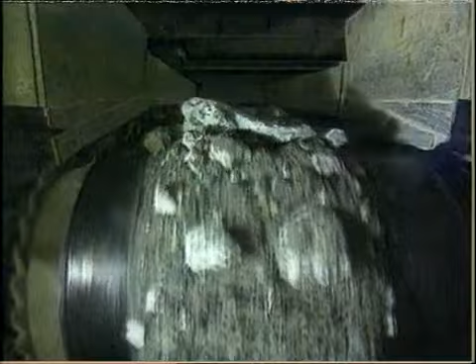When you're about to drink some water, do you ever think about whether or not it's clean? No, I've never thought about it. I'm sure it's clean, no problem. Only to a certain extent. Say, in Ma On Shan, there is sand in the water. In some districts, the water is poor in quality. Drinking water is sometimes clean, but sometimes it isn't.

We say that drinking water is purified if it has been treated by the treatment works. A person needs about 120 litres of purified drinking water daily. How can this water be considered clean? According to the Water Supplies Department, drinking water in a modern city should be clear, odourless, wholesome and bacteria-free.

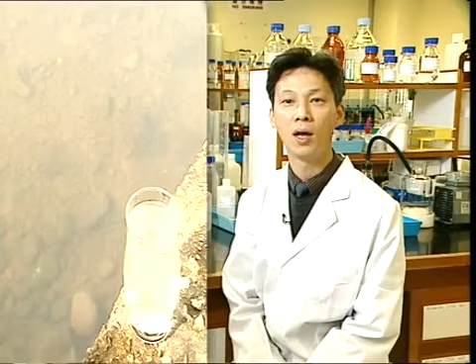Here is a glass of river water. Is it good enough for drinking? Does it meet the criteria of the Water Supplies Department for being clear, odourless, wholesome and bacteria-free? Of course it isn't. River water might contain sand and other solid particles, as well as lots of invisible living things, organic matter and inorganic substances.

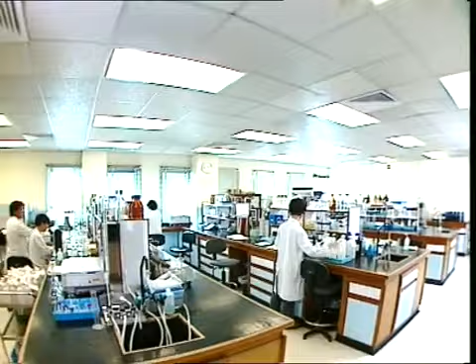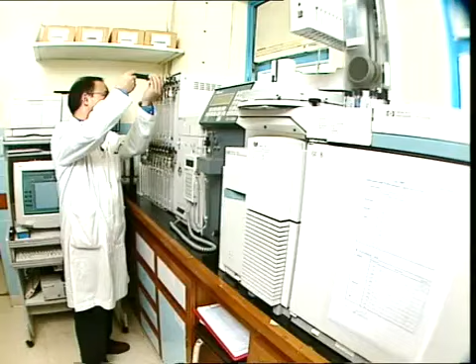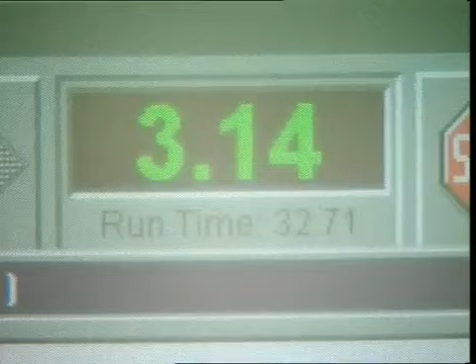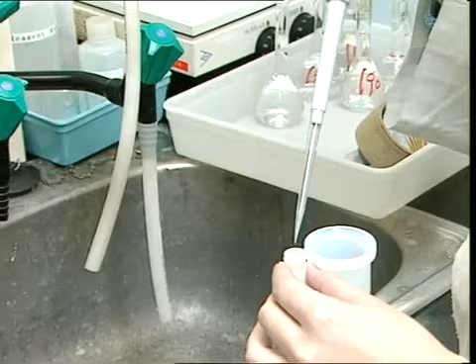The water filtered here, before it is supplied to users, has to be randomly sampled and tested to ensure that it meets the standards of the World Health Organization. For instance, we would use gas chromatography to calculate the trihalomethane content. We use an atomic absorption spectrometer to determine the level of heavy metallic ions.

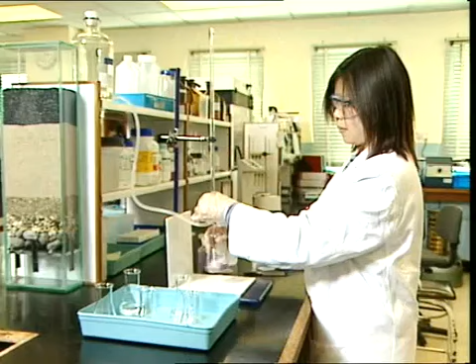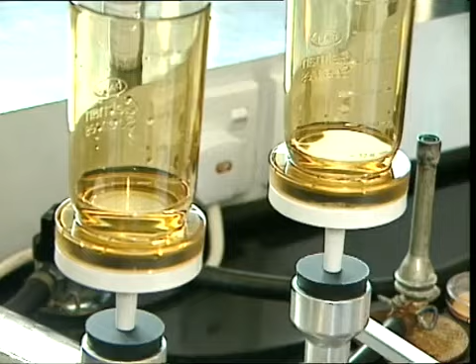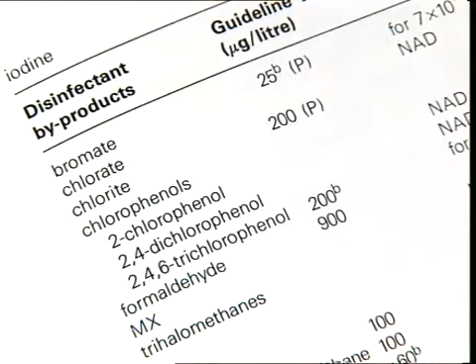We use titration to measure hardness. And membrane filtration allows us to estimate the amount of E. coli. A total of over 100 parameters have to be maintained, and all of them have to meet the standards laid down by the World Health Organization. Then, the water is considered suitable for human consumption.

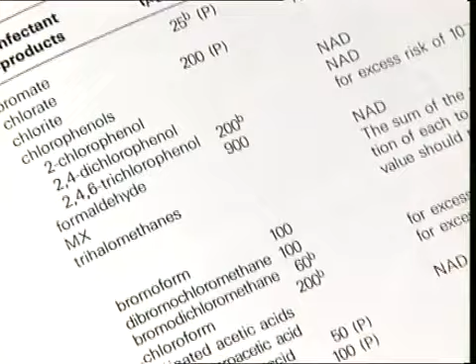In 1892, a strange event happened in two German cities, Hamburg and Altona, on opposite banks of the River Elbe. People of both cities drank from the river. In Hamburg, people led a happy life. Everybody drank from the river and lived peacefully. Until one day. Oh, I've got a sore belly. Me too. We do as well. In a short while, many citizens complained that they had a sore belly. Later they died.

What's strange was that on the opposite bank, people in Altona were fine, though they also drank from the same River Elbe. What was the reason? The mayor of Hamburg immediately sent agents to Altona to investigate, and they discovered the secret. It turned out that although people in Altona also drank water from the River Elbe, they filtered it before drinking.

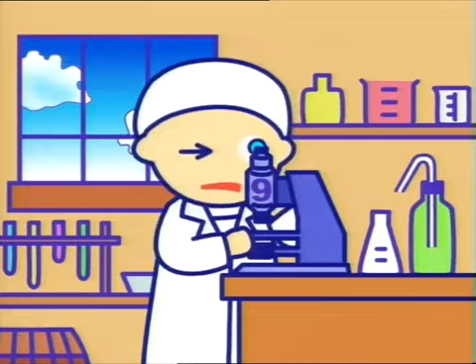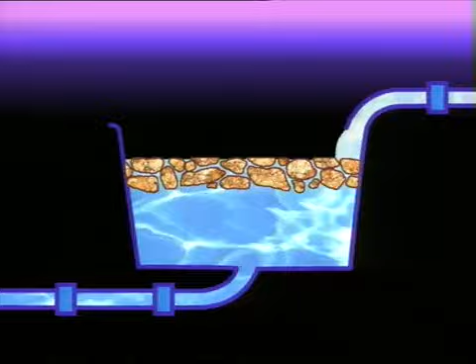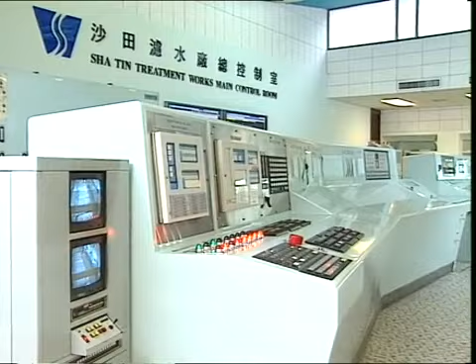Later, it was found that the cause of death among the people in Hamburg was that the water was contaminated with cholera bacteria. Hamburg started to filter its water before supplying it to its citizens. What a disaster it would be if we didn't have water filtered before drinking. It's fortunate that we have water treatment works here in Hong Kong. It's much more hygienic to drink filtered water.

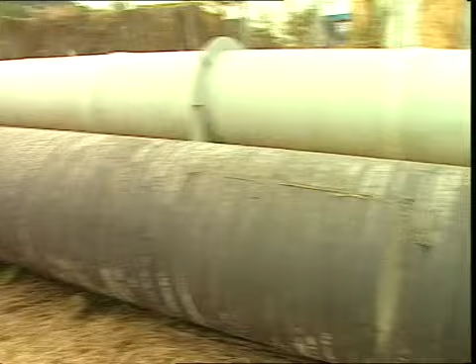Drinking water in Hong Kong comes from two main sources: rainwater collected from upland catchment areas of local reservoirs, and river water from the Dongjiang River in Guangdong Province. Water collected from streams and rivers is known as natural water, whereas water from the tap is called drinking water.

According to the Water Supplies Department, the quality of drinking water from sources inside the SAR is quite good, as the catchment areas are located upland, where pollution from human activities is kept to a minimum. Moreover, particles in the water settle as the water runs from its source into reservoirs. Aeration and direct sunlight also result in purification. The role of the water treatment works is to convert natural water into drinking water.

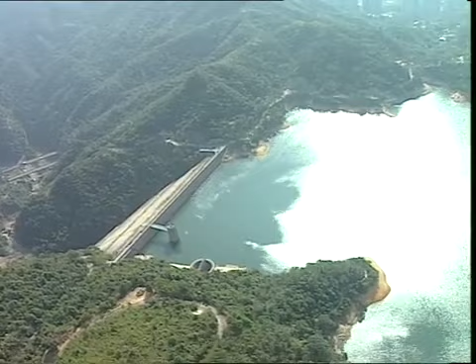As early as 1939, with the exception of the Shouson Hill area, the water supply to the people on Hong Kong Island and in the urban areas of Kowloon was filtered. Nowadays, there are many water treatment works in the SAR. Among these, Sha Tin Treatment Works is the largest. Let's take a helicopter ride for an aerial view of it. Here is Sha Tin Treatment Works.

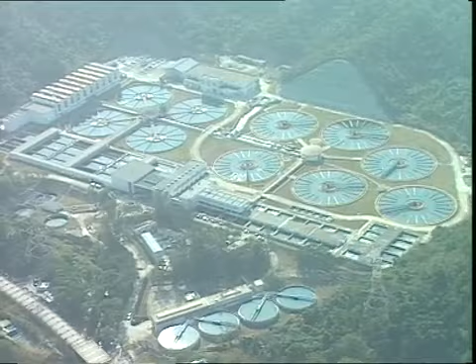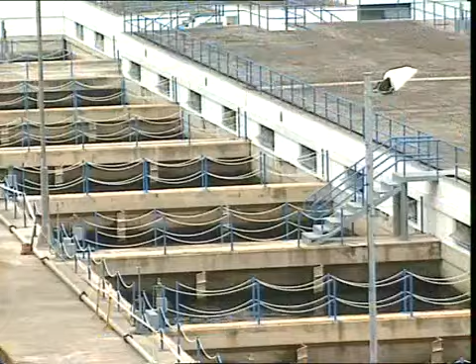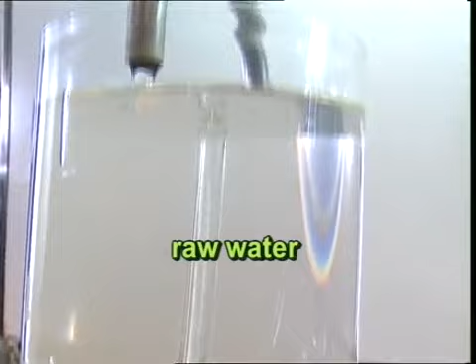Viewed from above, there are two types of pools of different shapes. There are about 10 big round pools, which look like the tires of a car, with horizontal lines on the inside. The remaining pools are rectangular. There are several dozens of this type. The water treatment process is quite simple. Staff of the treatment works use the name raw water for natural water. Raw water from different sources passes through tunnels and enters the plant. To facilitate the treatment process, several chemicals are added.

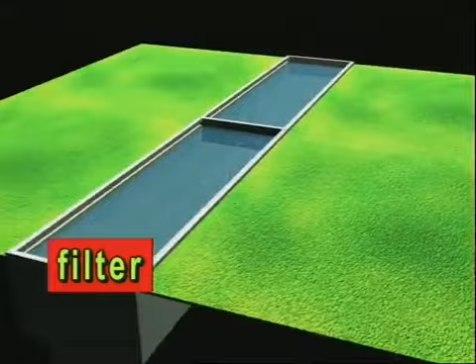The water with chemicals then goes into this big round pool called a clarifier, which is used for the settlement of large, solid particles. After passing through the clarifier, water then goes into this rectangular pool called a filter, where finer particles are filtered. Finally, with the addition of some more chemicals, the water is ready for human consumption.

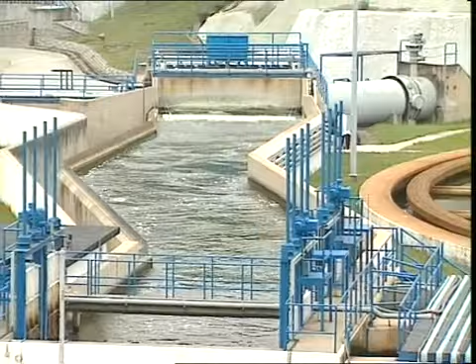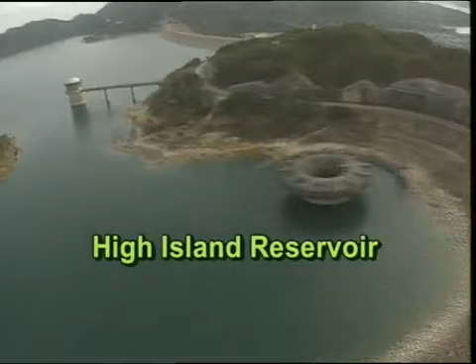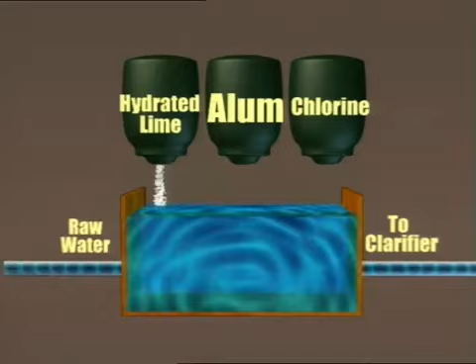Raw water comes from 5 different sources: the Dongjiang River in Guangdong Province, High Island Reservoir, Plover Cove Reservoir, Lower Shing Mun Reservoir, and many upland catchment areas. At this stage, 3 types of chemicals are added to the water. They are hydrated lime, alum, and chlorine. The white liquid dripping into the water is hydrated lime solution. It is used to regulate the pH level of raw water so as to facilitate the following treatment process.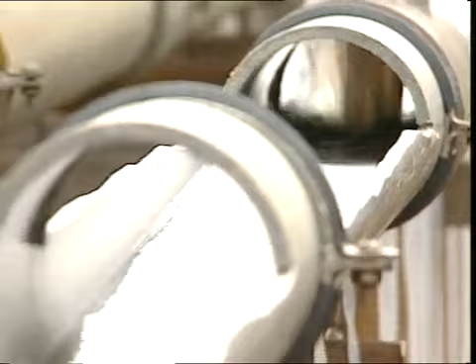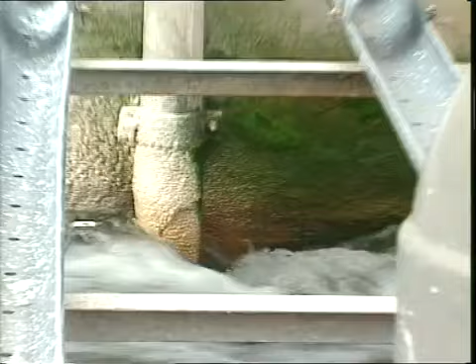The second chemical added is alum. Alum is a chemical called aluminium sulfate. When it is added into water, it helps suspended particles to coagulate into large lumps, which can easily settle onto the floor of the clarifiers. The third chemical added is chlorine. A chlorine solution is pumped in through these 2 tubes.

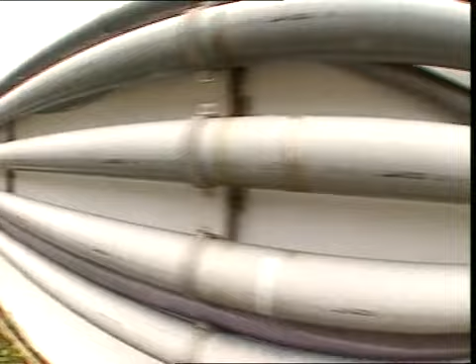As chlorine is toxic, it has to be contained in sealed tubes and injected into water. Why is it necessary to add a small amount of toxic chlorine? It is for preliminary disinfection and clearance of algal outgrowth in the pipelines during the water treatment process.

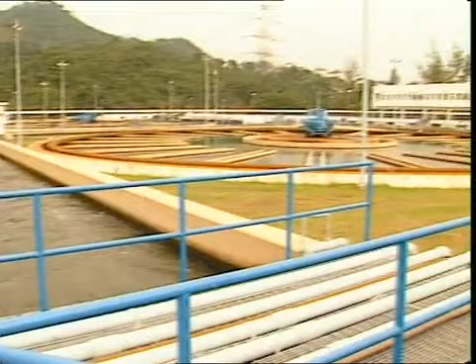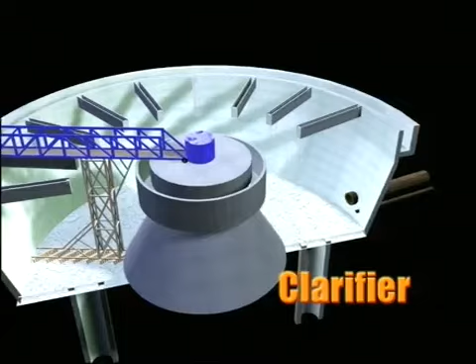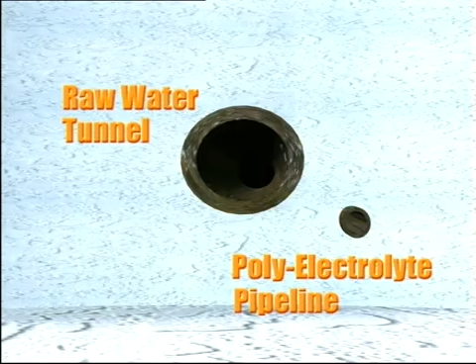The water treated with chemicals then flows within the pipelines underneath this route and drains into the clarifiers for settlement of suspended solids. Let's take a look at the structure of this clarifier. There are 2 pipelines on the bottom. The thicker one is the inlet for the treated raw water, whereas the thinner one is for the injection of polyelectrolyte. What is the use of polyelectrolyte?

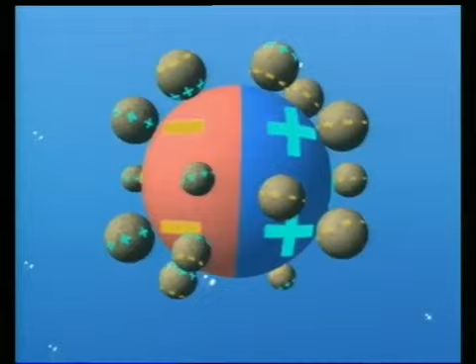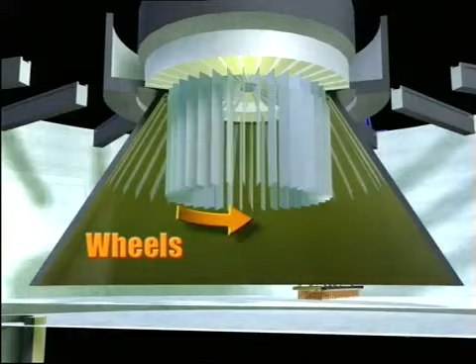Polyelectrolyte is a mixture of many positively and negatively charged particles which attract one another. When the polyelectrolyte is added into water, this attraction among the particles leads to the formation of suspended solids that settle on the bottom. Take a look at the center of the clarifier. There are many revolving wheels. The turning of the wheels helps the suspended particles to coagulate into solids, which settle onto the floor in the form of sludge.

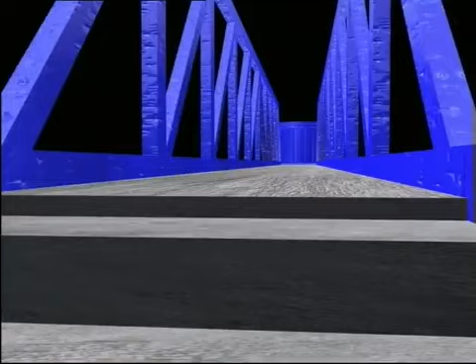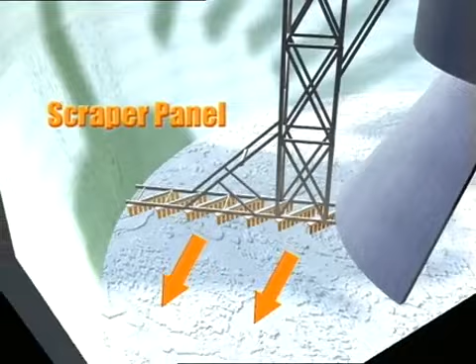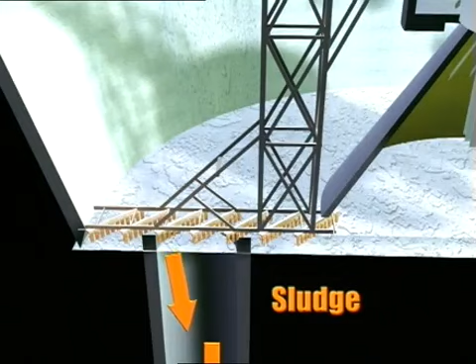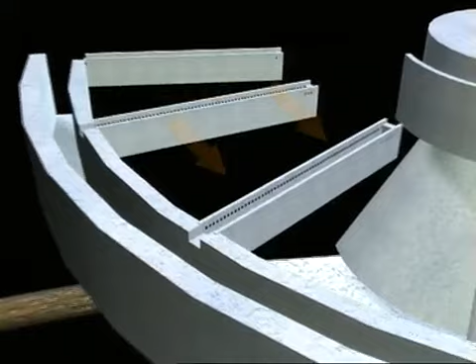This big blue frame also turns round the clarifier slowly. There is a scraper panel underneath the frame. When the frame revolves, the scraper panel scrapes up the sludge on the bottom and pushes it into the sludge tunnels. Finally, the treated water is sent to the water collecting channels. While suspended particles are settling in the clarifiers, the clear water flows on top and passes through these little holes into collecting channels. Water collected in the channels is then led to the filter for filtration.

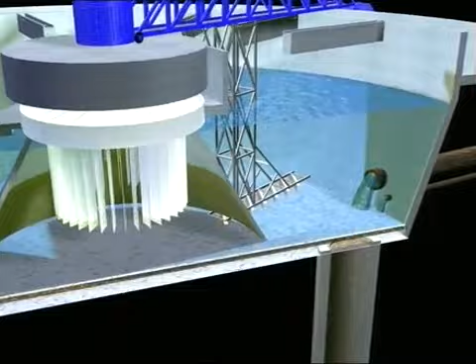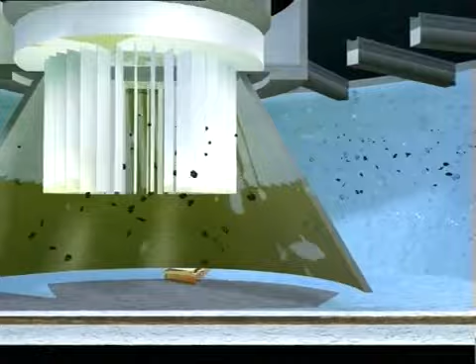Let's start up every part of the clarifier. The entire clarification process proceeds in this way. With chemicals added, raw water flows into the clarifiers. Alum and polyelectrolyte in the water helps suspended particles to coagulate into larger lumps. The movement of the revolving wheels helps the suspended particles and coagulated lumps stick together. The heavy lumps settle on the bottom.

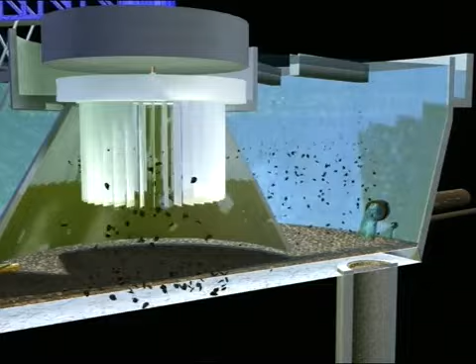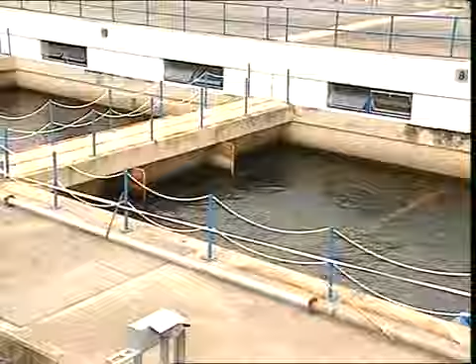As the blue frame slowly revolves round the clarifier, the scraper panel underneath scrapes up the sludge on the bottom and pushes it into sludge tunnels. The clear water on the surface flows through the holes into collecting channels and is then led to the filter for filtration. Finally, we arrive at the filter. Its main function is to filter the finer particles that remain suspended in water after the clarification process.

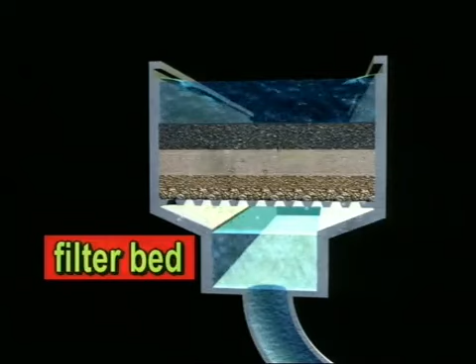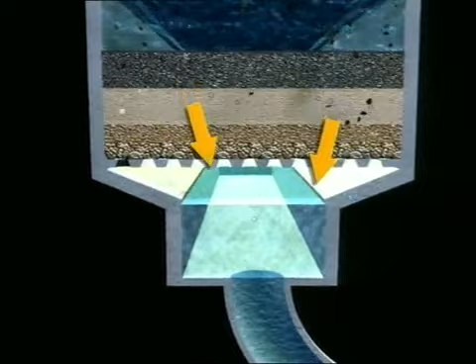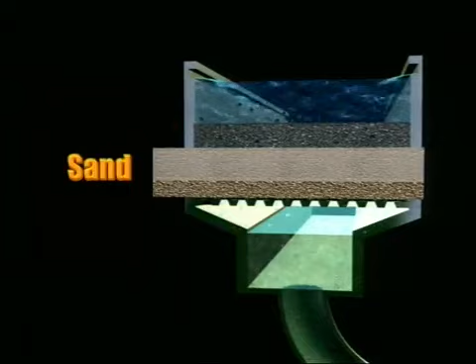After clarification, water flows into the filter and gathers here. It's called the filter bed. The filter bed is composed of several layers. From the top downward are the layers of anthracite, sand, and gravel. This is a model of the filter bed. There is a layer of anthracite on top. Below it are layers of fine sand, coarse sand, and gravel.

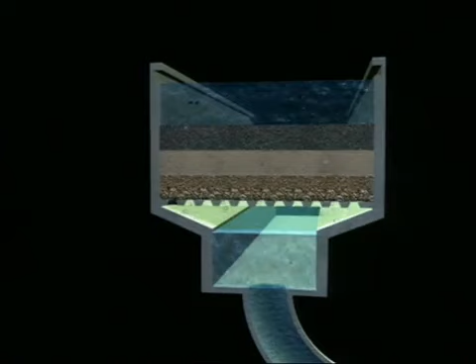The anthracite particles are 1.2 millimeters in diameter, but the fine sand is 0.6 millimeters, half that of the anthracite particles. The anthracite layer retains the larger particles and lets finer particles pass through. When the finer particles reach the sand filter with smaller pores, they will be retained as well. Water passing through the filter bed becomes clear. To enable better filtration, particles in each layer of the filter bed should be in descending order of size from top to bottom.

Why is there coarse sand in the third layer and even bigger gravel in the fourth one? These two layers of sand and gravel are not used for filtration. They serve to support the layers of anthracite and fine sand above. Generally speaking, the thickness of the anthracite layer and the fine sand layer is 300 millimeters each, adding up to a total of 600 millimeters. Each of the two supporting layers is 150 millimeters in thickness, adding up to a total of 300 millimeters.

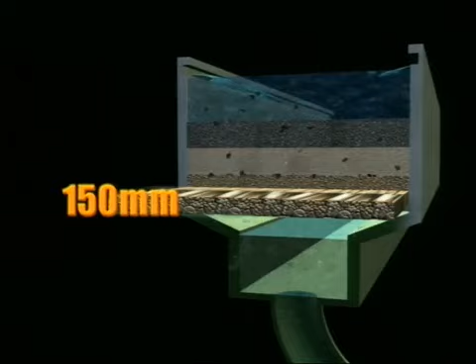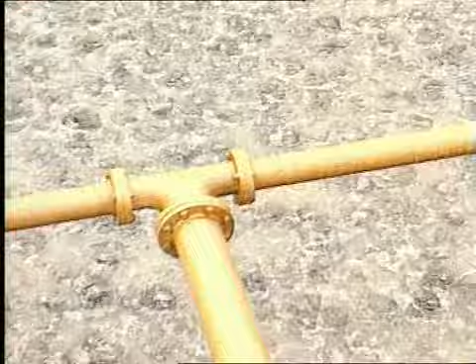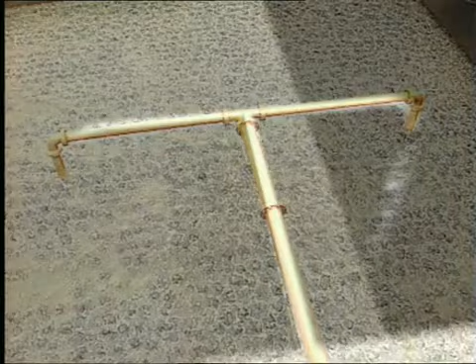Continuous filtration results in lots of particles being trapped in the anthracite and sand layers. Will the filter bed eventually become very dirty? After a filter bed has been used for a while, it has to be backwashed. The purpose is to clear the retained particles and keep the filter bed clean. First of all, compressed air is pumped in through the pipes to the filter bed to stir up all the particles retained in the layers during the filtration process. As these particles are lighter than the filter bed materials, the former float up to the surface. These sludge materials are the solid particles retained by the filter bed.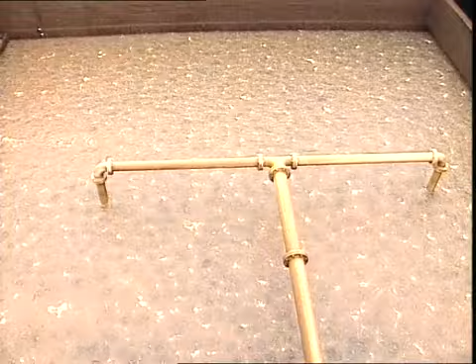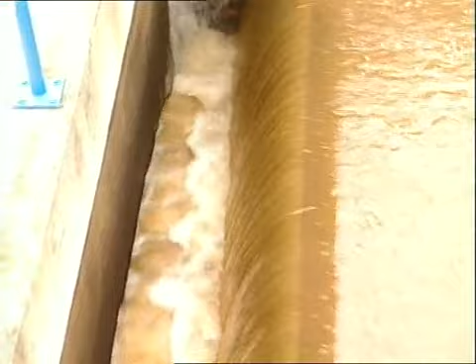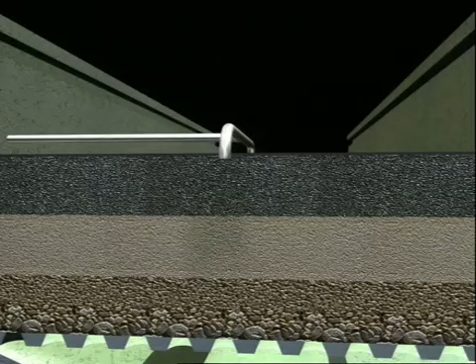After a certain period of cleaning, water is pumped into the pool. The water level is rising. When it reaches the top mark, the sludge flows away over the rim. When the cleaning process is completed, the pumping of air stops. The particles of the filter bed settle according to their weight. As sand is heavier than anthracite, it settles to the lower layer, while anthracite stays on top. In this way, the particles of the filter bed are rearranged to form a clean filter bed again, ready for the next cycle of filtration.

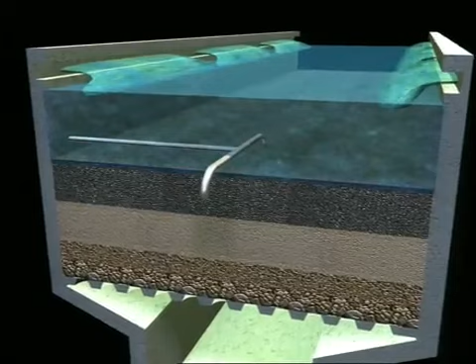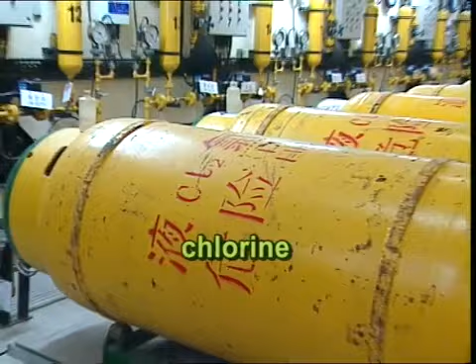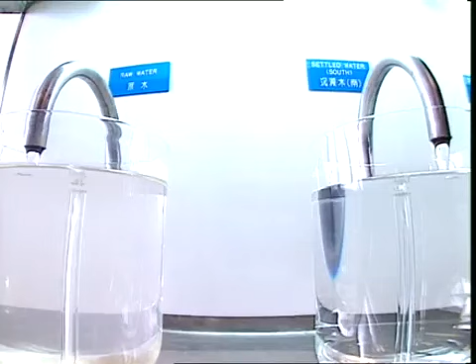Raw water, having been allowed to settle its contents in the clarifiers and filtered in the filter bed, is subject to dosing with some more chemicals before it can be supplied for human consumption. The chemicals are hydrated lime, chlorine, and fluoride. Hydrated lime is an alkaline material. What is the purpose of adding it to the water? After the process of clarification and filtration, water becomes slightly acidic. Alkaline hydrated lime is added to neutralize the acidity.

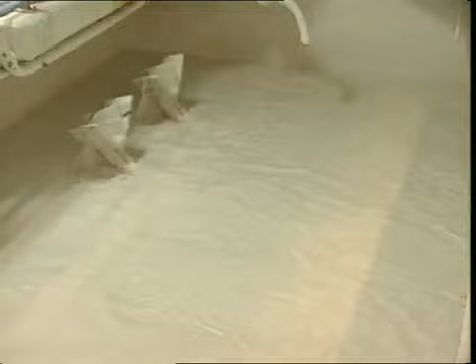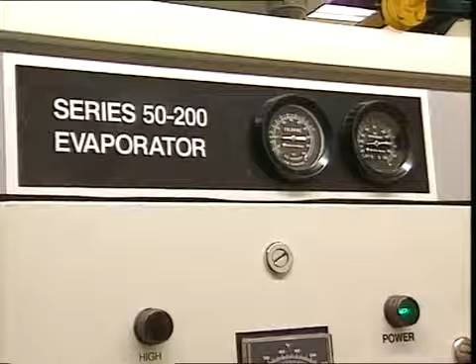Besides, many water pipes in old buildings are made of iron. Water tanks also contain iron parts. As iron is ready to rust in an acidic environment, alkaline hydrated lime is added to neutralize this acidity so as to prevent rusting. This is the chlorine room. These bottles contain toxic liquid chlorine. Liquid chlorine is evaporated through this apparatus and mixed into the filtered water. The purpose is to kill the bacteria in the water.

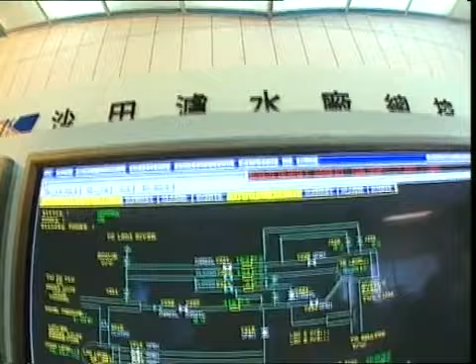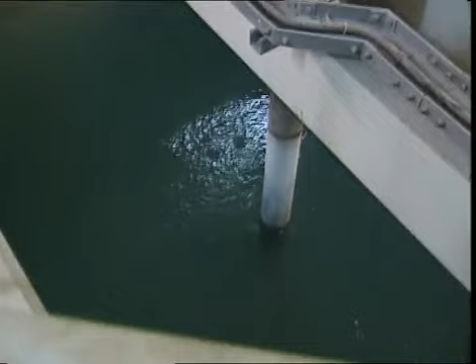Don't worry, all the chemicals added into the water are carefully calculated and monitored. The process complies with the standards laid down by the World Health Organization for water quality. Finally, a fluoride compound is added to the drinking water to enhance our dental health.